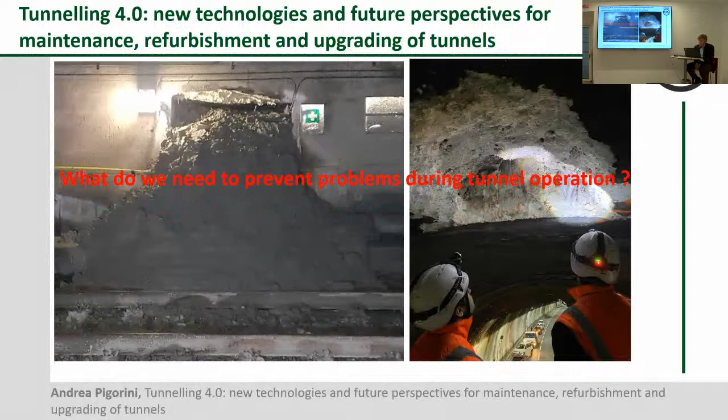So I want to start with my presentation. What do we need to prevent problems during tunnel operation? I wanted to start with these two pictures that show big problems, like the egress of ground from a sidewall of a tunnel, from a niche. This was a niche on a railway tunnel that was in operation, and this big void that sometimes we find above the tunnel crown, above the pre-lining. These are very dangerous because the rock can collapse, and they have been found during inspection because there were some problems, and you can see the cars below.

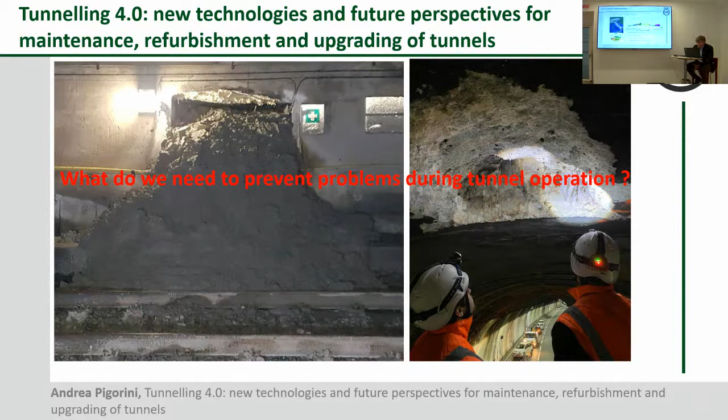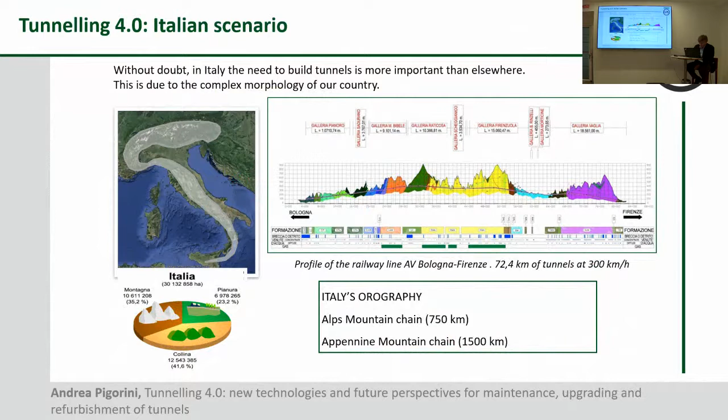This can be a problem, and of course in Italy we have to deal with these problems because we have a lot of tunnels. It's very important because of the country - more than 76% of our surface is basically hilly or with mountains. And that's why we have a great number of tunnels, more than 2,100 kilometers of tunnels, road and railway.

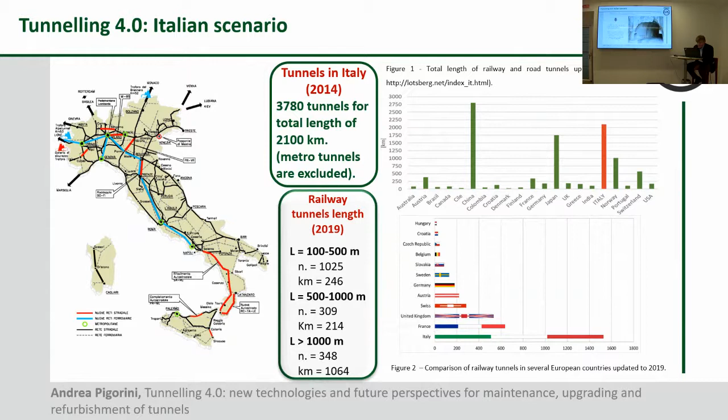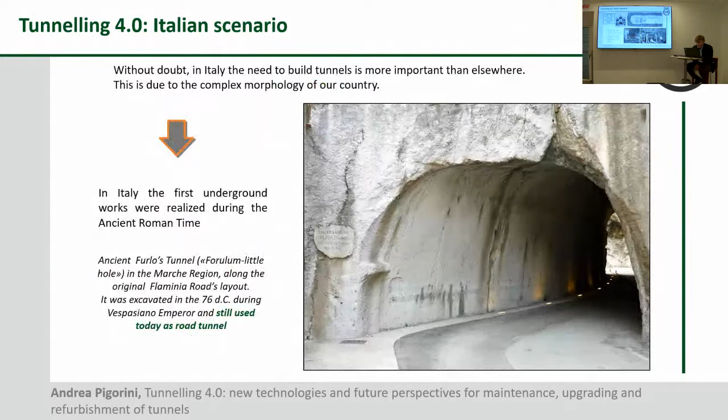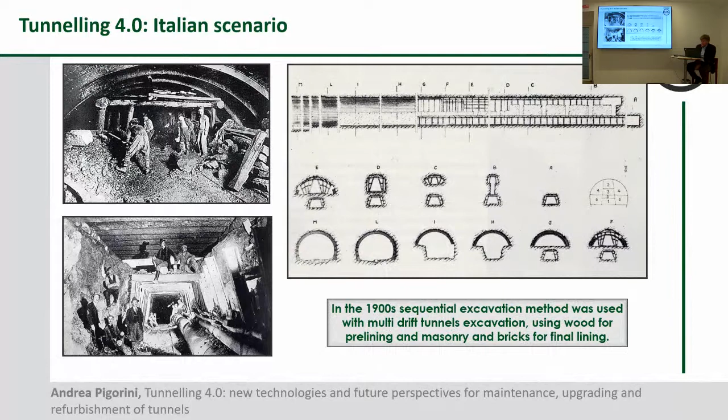Coming to the railway, it's about 1,500 kilometers. And of course, we started to dig tunnels, to excavate tunnels, since ancient Roman times, and sometimes they're still used today as road tunnels. But coming to the industrialization of the tunnel industry, we can probably fix it during the construction of the Frejus railway tunnel in 1871, where also the first compressed air machines were used, the father of modern tunneling. Then, going on through the years, we excavated a lot of tunnels using the sequential excavation method, with multi-drift tunnel excavation using wood for pre-lining and masonry and bricks for final lining.

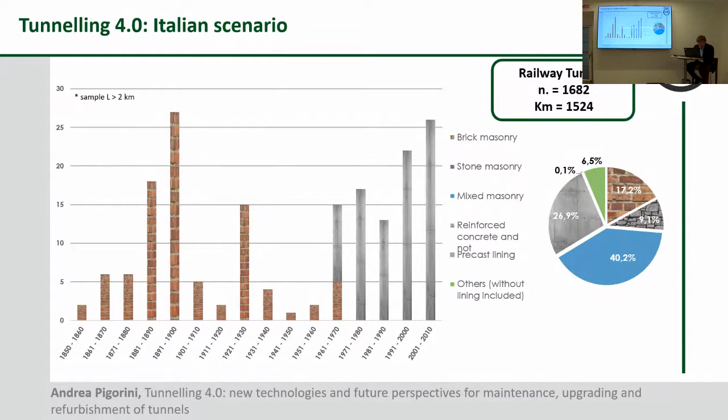So coming to the railway tunnels, we can give you this figure: basically, around 30% of our tunnels have lining made by concrete, cast or reinforced or not reinforced, and more than 60% of our railway tunnels have lining made by bricks and stone masonry.

Coming to a tunnel life cycle assessment, we have new construction, then of course maintenance: minor works needed to guarantee tunnel design service life, like dealing with water problems and waterproofing. Rehabilitation is for bigger problems, such as tunnel invert lifting, requiring important structural rehabilitation works. Then upgrading of the tunnel, when sometimes you have to double it, reshape it, or enlarge it to host a bigger gauge or more tracks. And then, of course, disposal or better reuse of the tunnel for different purposes.

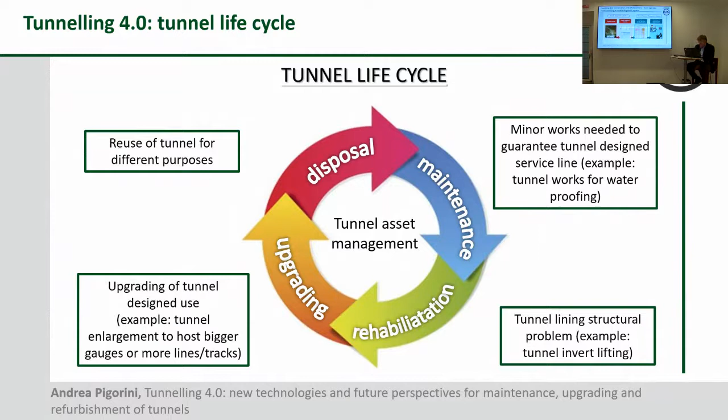We have experienced, in the Italian State Railway, a mobile diagnostic system that can scan and map thousands of square meters of linings very quickly, producing a report and data analysis to evaluate the damage of the tunnels, and then define priority for refurbishment works.

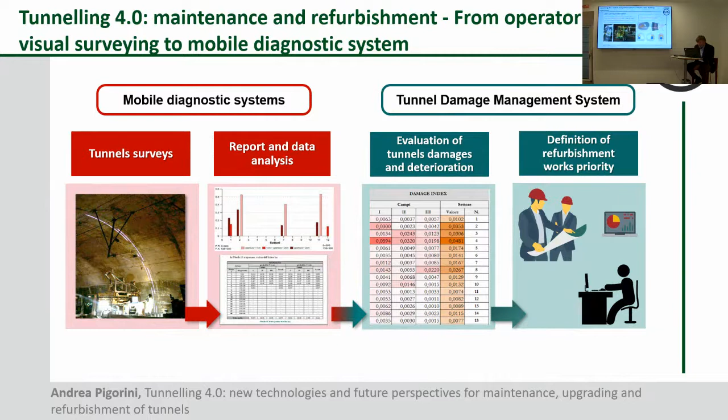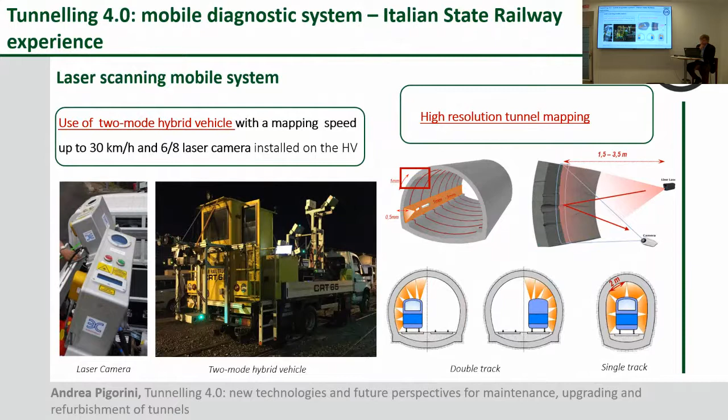We experienced different vehicles, and came up with this two-mode hybrid vehicle that can go up to 30 kilometers per hour, quite fast, scanning with high resolution and mapping all the surface of the lining. We also have post-processing software that can detect lining damages and wet portions of the lining, and these tools are very friendly with virtual reality tools.

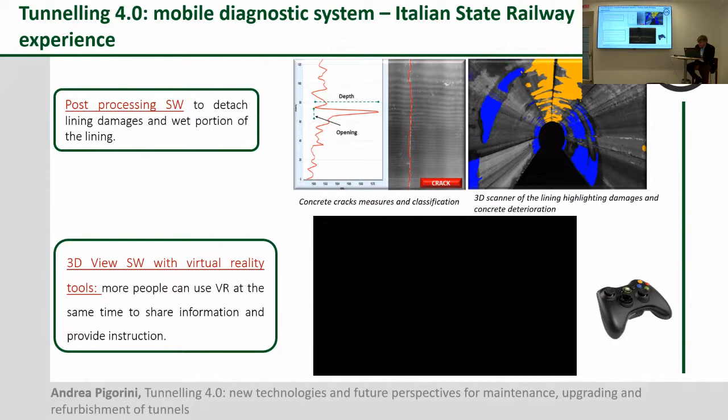I won't show the movie for time, but you can inspect your model with virtual inspection, basically after you have scanned your tunnel surface.

With Trento University, we have improved and validated an algorithm to evaluate tunnel lining damages from data acquired through the mobile diagnostic system. We divide the tunnel into stretches, classify the damages, then evaluate the damage severity, giving an index, and also the damage diffusion. Then you can define a priority for maintenance and rehabilitation works.

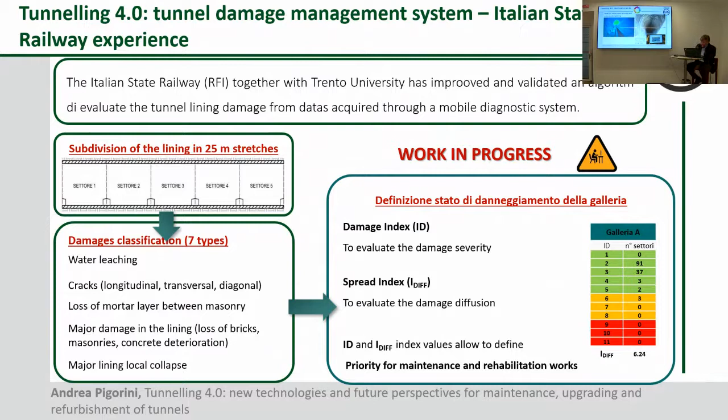Coming to some maintenance works, the easier one: you scan the surface of the tunnel, double check on field, then design contact grouting, crack repairing, drainage and waterproofing with sprayable membrane, second layer of shotcrete. These are important works, but let's say minor works for maintenance.

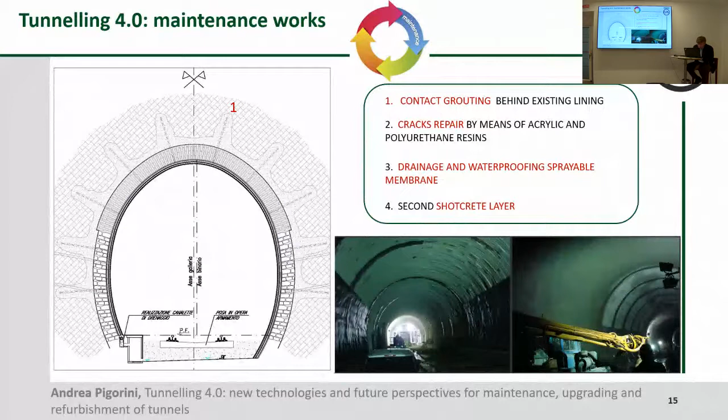When you go to structural strengthening and waterproofing tunnels, you probably have bigger works, like dealing with injection, because as you can see in this picture, often you have this void at the back of the old lining, and you need to fill it up with mortar.

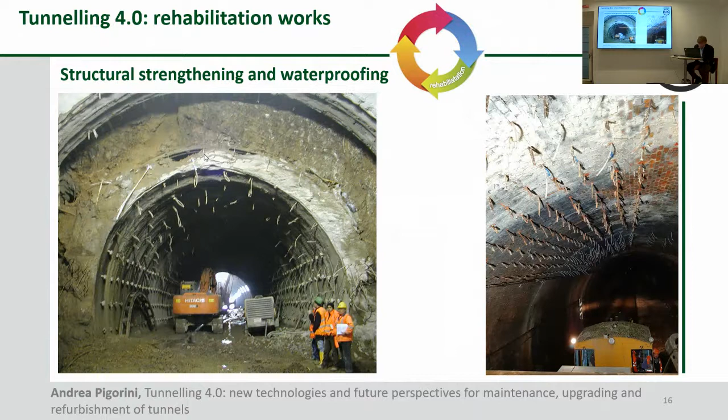Sometimes you need an invert or a slab to close the tunnel, also in the invert. Sometimes the invert in the old tunnel is in bad shape, a banana-shaped invert with very little thickness at the critical point where the invert meets the sidewalls. This can crack, can break, and in some cases you have to rebuild the tunnel invert, even using artificial ground freezing if the tunnel is in permeable, water-bearing ground.

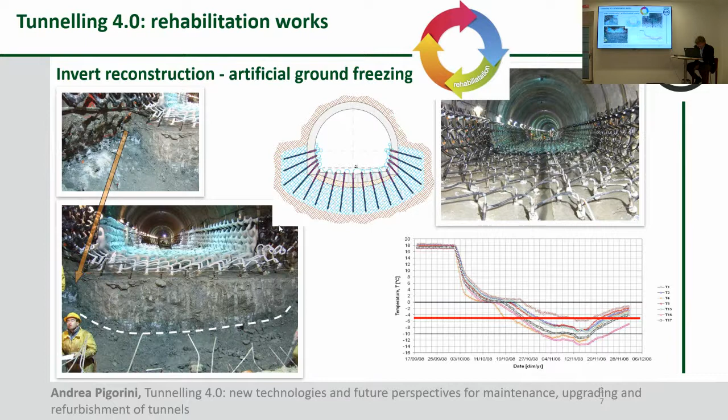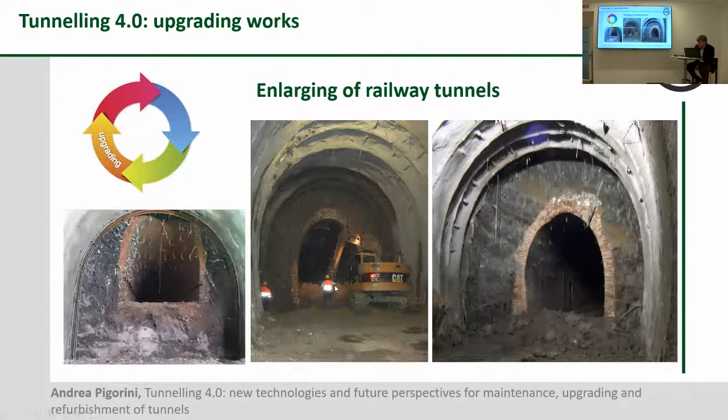When you go to upgrading works to enlarge tunnels, if it's outside of operation, it's easier — you demolish the tunnel while constructing the new one. But in some cases, we have been able to enlarge the tunnel while leaving the operation underneath it active.

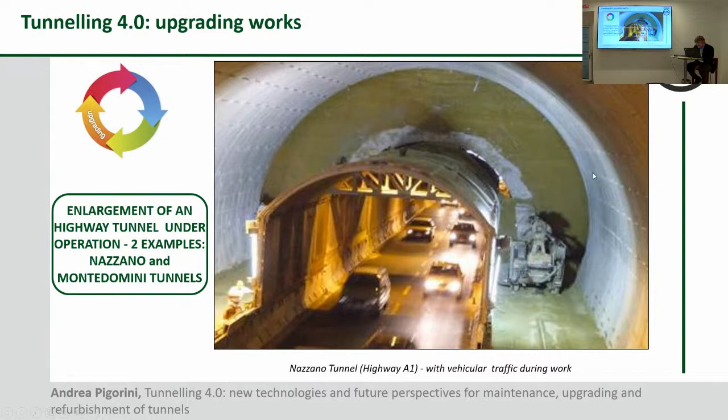Basically, we use protection shields for the whole tunnel lining that is going to be demolished, then the enlargement surface and the new tunnel lining. This has been done in a couple of projects in Italy, always on the highway, in the Nazzano and Montedomini tunnels.

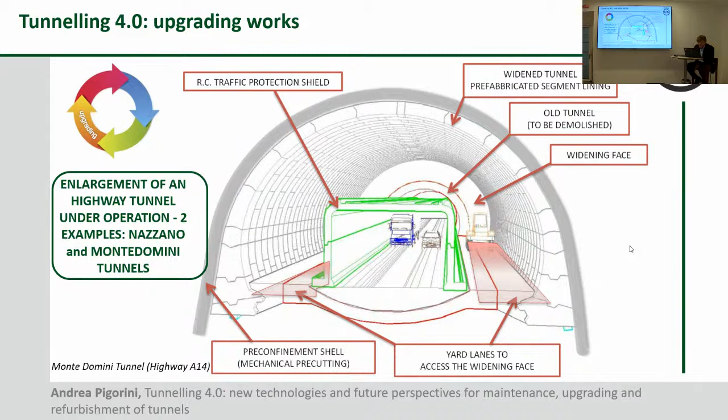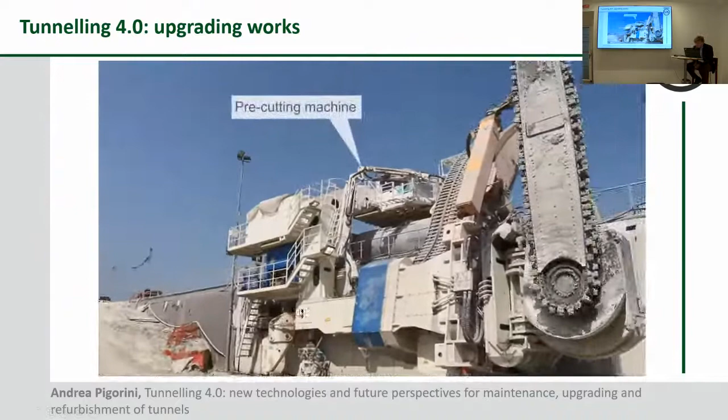I want to show you, if Pablo helps me, a little video that probably gives you the idea better than my words. So you've got a pre-cutting machine with this big saw.

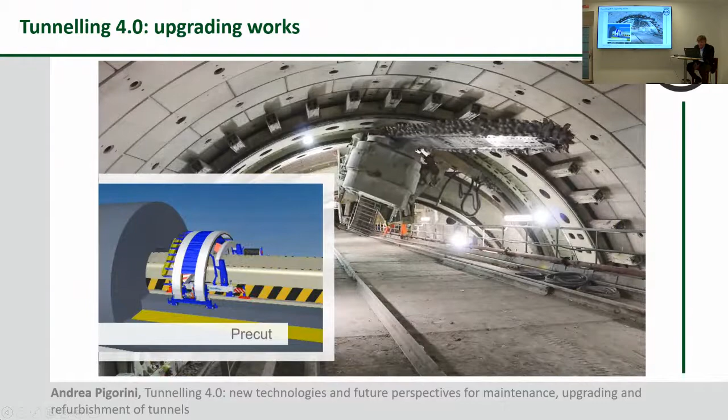The old tunnel, and then the excavation work to expand the tunnel is carried out using the pre-cut technique, which enables a protective structure to be created before excavation takes place.

The earth around the tunnel to be excavated is cut away with a 6-meter long and 50-centimeter thick blade. This cavity is then filled with sprayed concrete, reinforced with steel fibers. A concrete shell is thereby obtained that allows the excavation to proceed in safety.

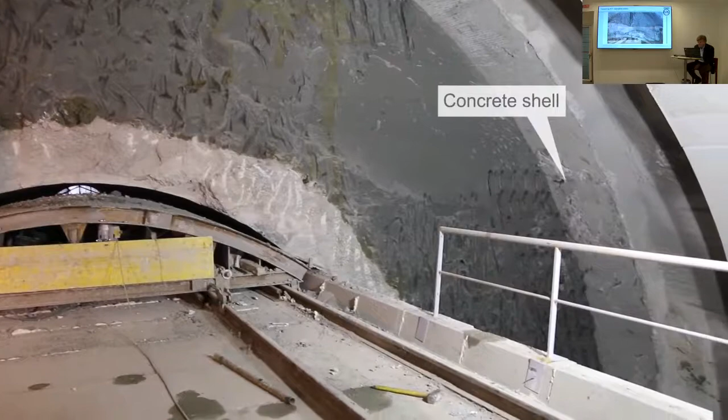The cutting blade is guided by a special machine that enables it to be precisely directed along a predefined arc. Once the protective concrete shell has been completed, the excavation continues with conventional methods using excavators.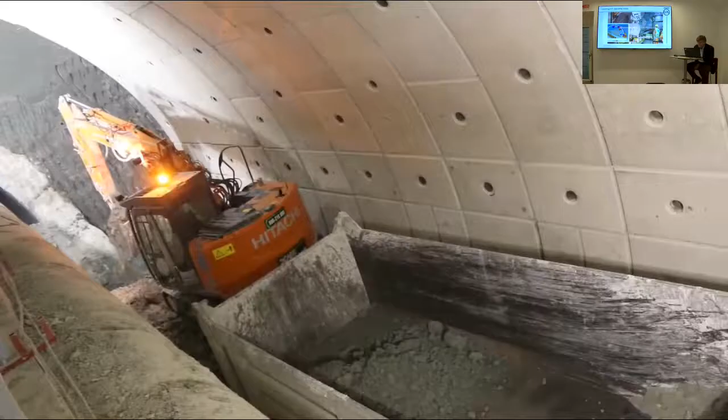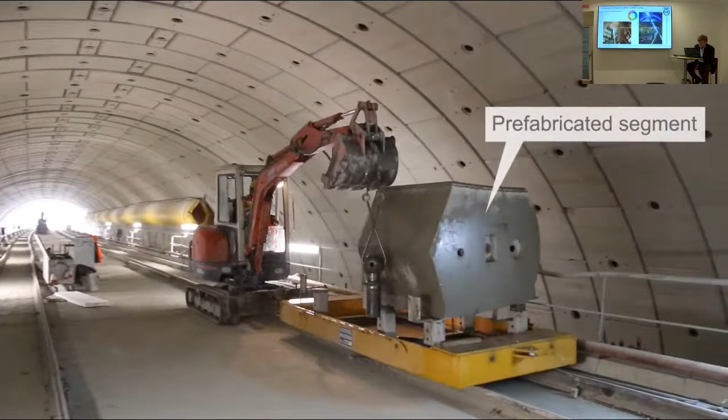In the wake of the excavation, at a distance that never exceeds 6 meters, the tunnel's final lining is carried out through the installation of prefabricated segments. This is achieved using another specialist piece of machinery developed for the project that enables the segments of the lining to be handled and installed in safety.

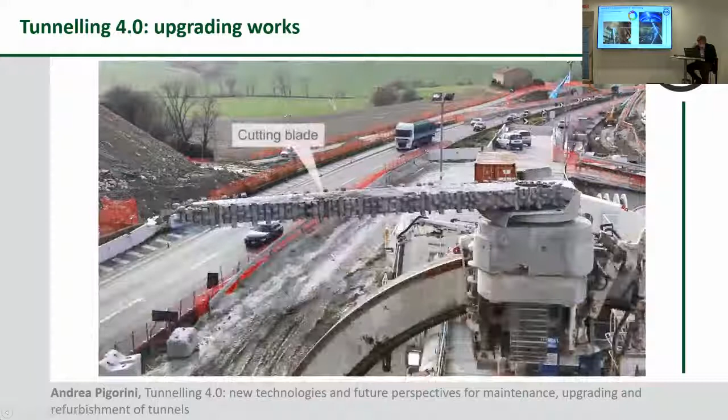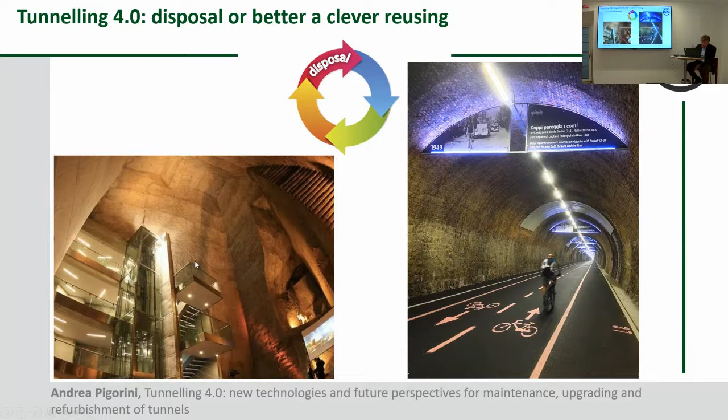This is an important method to enlarge tunnels under operation, especially road tunnels. Well, better disposal, better clever reusing. You can use your tunnel often for cycling, or this big cavity you use for underground car park. So this is a nice disposal.

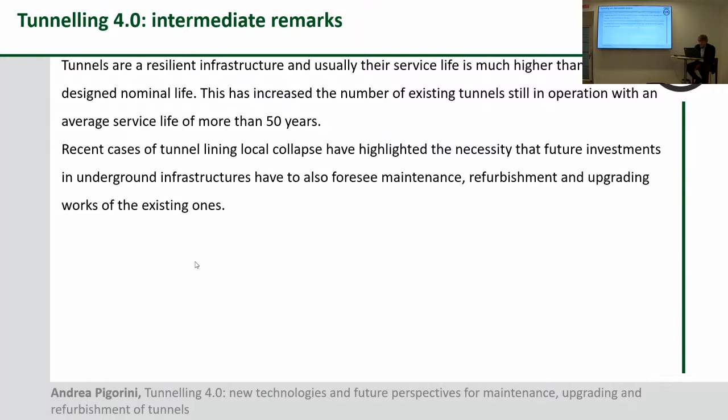Tunnels are resilient infrastructure, and usually their service life is much higher than their design nominal life. This has increased the number of existing tunnels in operation with an average service life of more than 50 years. Recent cases of tunnel lining local collapse have highlighted the necessity that future investment in underground infrastructure have also to foresee maintenance, refurbishment, and upgrading of works of the existing ones.

New technology can help to manage the entire life cycle of tunnels by using large-scale monitoring, automatic process of tunnel lining scanning to realize the tunnel digital twin, to which apply algorithms to detect lining structural problems and damages. When dealing with existing tunnels, geological and geotechnical models are still very important to understand the causes of detected problems. The industrialization of rehabilitation work is an issue still to be improved.

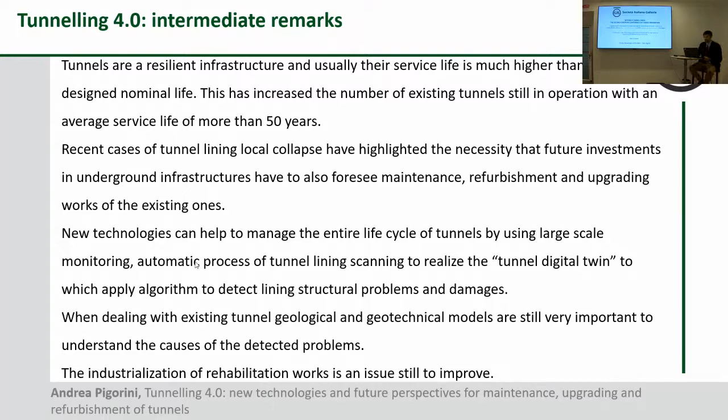Hi, good afternoon. I'm going to talk to you about engineering construction in a post-COVID world, and I'm going to focus on the Italian market and what we currently have about maintenance, investment, and potential of the new technologies.

As you know, in Italy, but around all the world, we have a high economic slowdown caused by COVID-19. We have a GDP reduction in 2020 estimated about 12%. We have strong uncertainty about the economic recovery. And this tragedy represents, in a way, also an opportunity that can restart from the infrastructure sector and from the priority of what Italy has as infrastructure investment.

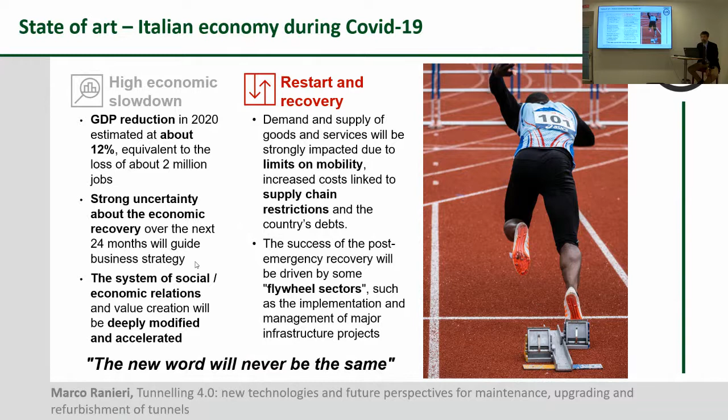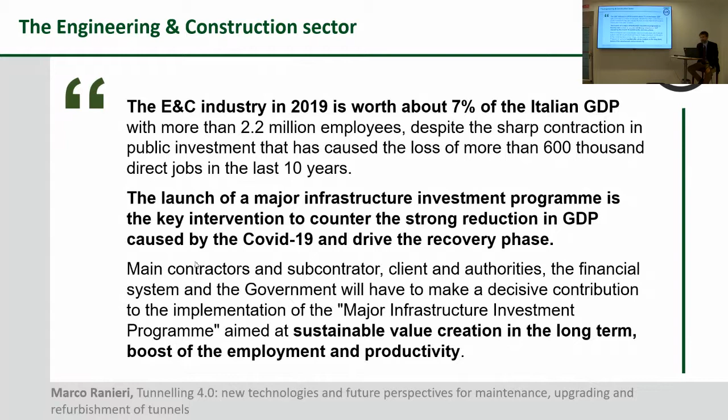It means that main contractors, subcontractors, clients, authorities, all the financial system and the government have to work together to give a contribution to the implementation of such a program, aiming to sustainable development in a long term, value creation on the territory, and starting from the maintenance of the asset that we have on our ground.

This slide summarizes the main numbers, the main elements of what engineering construction in Italy represents, and some of the main issues of such sector.

As we can see, there are some major problems, major issues: the time, the average duration of the major projects, the extensive amount of the contracting authorities, and the fact that Italy is currently at the 24th place in Europe in spending money and public resources from the EU.

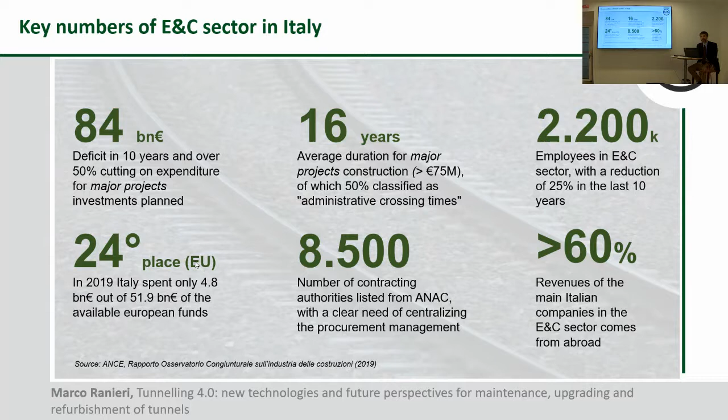The cutting of expenditure in the sector in the last 10, but probably 20 years, caused main contractors to go abroad, risking themselves, losing employees. Now the situation represents an opportunity for this reason, because the internal market can boost such industry recovery.

We identified 4 main areas, as you can see in this slide. The first one is to define investment priority, a list of projects, and unlocking both public and private money. The second one is to rebuild the key sector, the engineering construction sector overall, with new, resilient, stronger, bigger players. And the third one is about the projects.

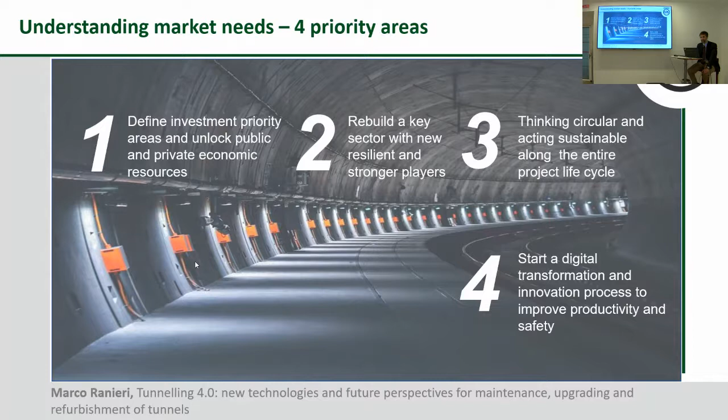So we have to think circular and think sustainable project along the entire life cycle. The fourth is regarding what we are talking about today, and is unlocking the potential, in particular regarding maintenance and repair of the asset. Here we can find the 4 areas of priority of the EU funds.

As you can see, the first and the third are probably the more critical for Italy now.

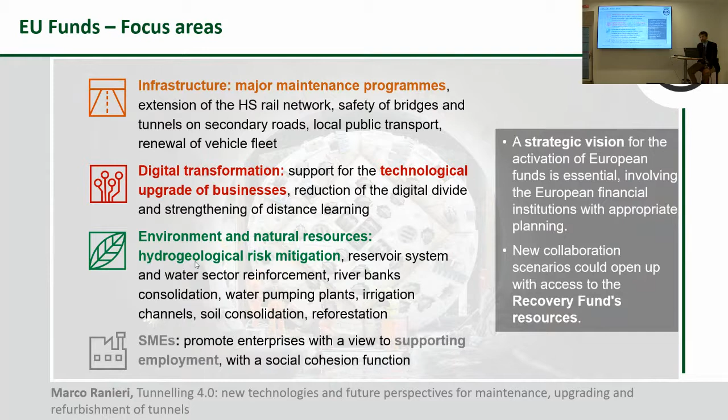After the collapse of Ponte Morandi, we have to concentrate our effort on a major maintenance program. As we're going to see in the next slide, we have an overall asset age on both rail and road networks of more than 40 years old, meaning we have to invest in maintenance. We also have a territory with hydrogeological risk that has to be mitigated, so we have to plan interventions, put money into it, and program all the projects to solve such an important issue.

This is what I was talking about. We have an extensive road network, and apart from it, a number of main structural works, more than 30,000, with half of them more than 40 years old. This means the effort can't be only on new projects, but has to be concentrated on maintenance, operation, and inspection of such assets.

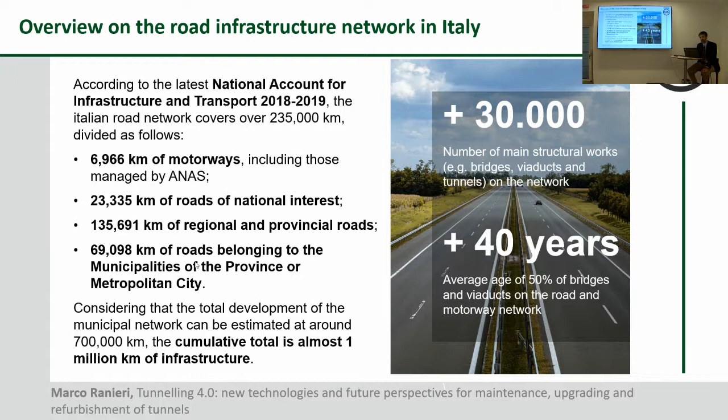So here we have the value of infrastructure maintenance. We know today that the approach to maintenance is different from what it was in the past. We talk about predictive maintenance. We have to put into all our planning phase and strategy the plan for maintenance of the asset. And we know the literature data show that the lack of ordinary maintenance produces a reduction in useful life of about 50%, with a consequent increase in maintenance cost.

That means that planning intervention of maintenance in a predictive way, using also technology for inspection and maintenance works, can also reduce and optimize cost for the concessionaire or for the company that is going to manage the asset.

Here we have how the maintenance and repair strategy and cost are today counted in the financial model. The financing model is currently highly dependent on the values and cycles of maintenance and repair. However, in most cases, this is an important point, but typically we use two kinds of estimating approach that are quite superficial.

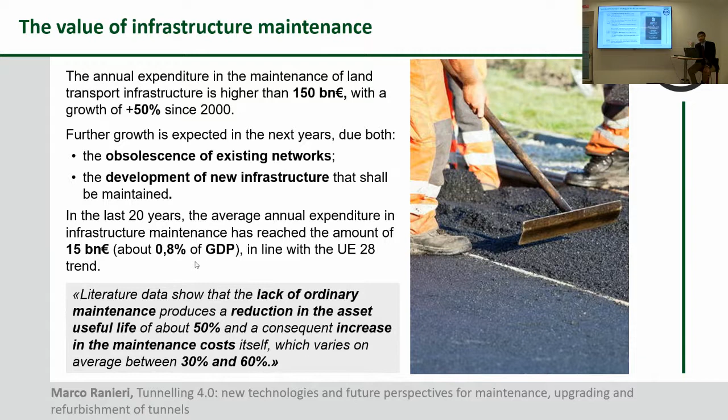In fact, we usually use benchmarking on data from engineering design studies, considering the maintenance of the assets as an overall number. Now, because of the complexity of it, more in-depth analysis would be required for complex infrastructure such as tunnels, considering the specific maintenance and repair needs of the different subsystems that compose the tunnels, and we need to optimize the financial profile of the project along the entire life cycle.

So the lesson learned is that new modern infrastructure tends to have lower maintenance costs in the first operating period, and that tunnels, as critical infrastructure, need an approach that goes more in depth to analyze what the maintenance and repair costs are and how they are split between the subsystems.

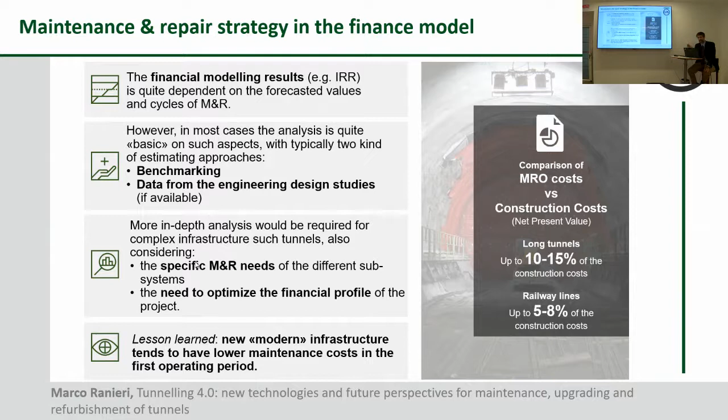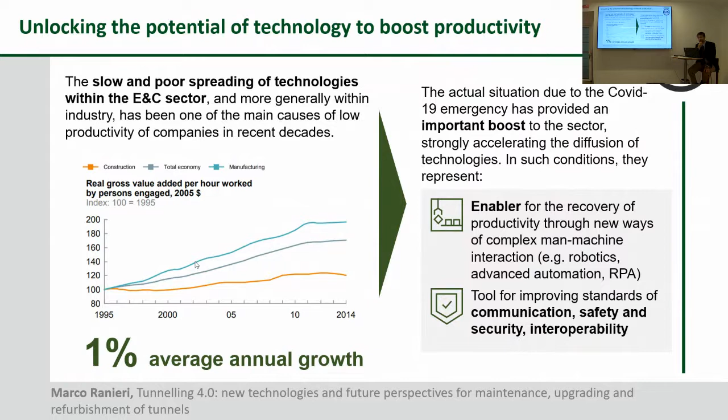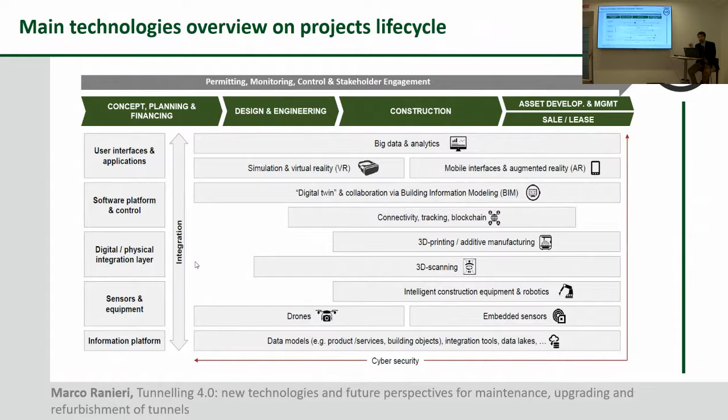Here you can see that technology is going to impact the entire life cycle of the project. Now we are going to concentrate on the asset development and maintenance phase, but there are different types of technologies and instruments that are going to have an impact. We have to introduce them not only for cost efficiency, but also to increase the safety standard of the asset.

So in conclusion, there are several technologies. We are going to see some of them with the presentations of Professor Miliziano and Professor Mazzanti about automation and monitoring control. In automation, we have digital mapping, for example, of pavement degradation condition, and immersive digital inspection for tunnels, but not only for tunnels. In monitoring control, we have artificial intelligence, satellite control, and for example digital twin and augmented reality for inspection. This means we are going to have different layers of instruments that allow us to control and inspect the asset also from remote.